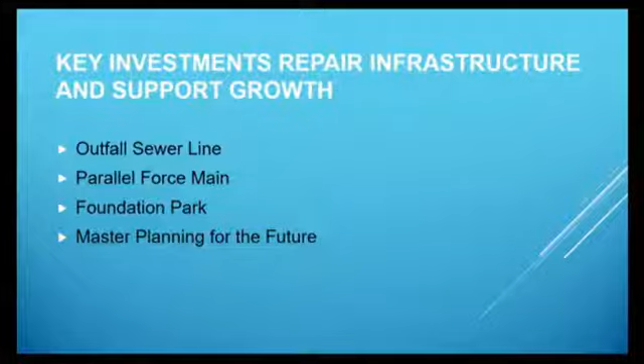First, the Outfall sewer. Why did we do it? There was a pipe installed nearly 40 years ago, a concrete 66-inch pipe with what we call a bituminous liner. That liner protects the concrete from the corrosive gases in sanitary sewer. The liner started to fail years ago, and ultimately those corrosive gases eat right into the concrete. Here's a picture: normally if you see rebar in a concrete pipe, that's at the midpoint. There were locations where the concrete was eaten past the rebar, and in some cases beyond it, so we could actually see the rebar cage sitting there. Clearly time to replace it.

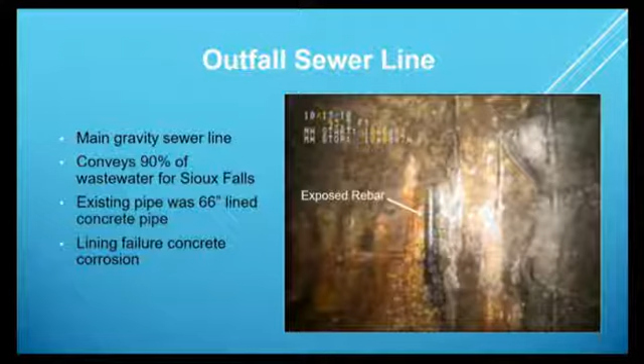The slice of pipe behind us is the best pipe made today. It has inherent corrosive resistance, and it's also larger for additional capacity. This pipe conveys over 90% of the city's wastewater, and is certainly going to be here for generations to come.

So, the overall picture of this project: it started at the EQ Basins, near the Street Division campus, essentially just north of John Morrell by the spillway. We did an improvement that allows us to fill those equalization basins faster. When we get a breach into the system during a major rain event, modern wastewater systems need these equalization basins—essentially large bathtubs—where we can cut the flow off so we don't affect downstream infrastructure. We recently brought forward a project that expands those basins. Our current piping system only fills the basin at about 20 million gallons a day, and we've doubled that capacity to fill it faster at 40 million gallons a day, providing a lot more safety for downstream infrastructure.

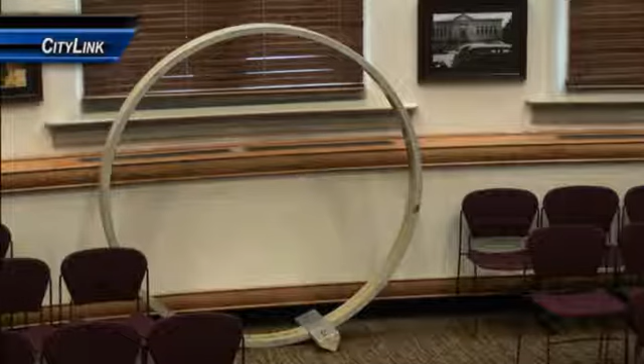You guys were out when we did the boring under Northcliffe Avenue. The same type of tunneling went under 229, and then we installed this 72-inch pipe that's behind us, which is in place for the majority of the alignment. One key change from the existing alignment is that the old pipe generally followed the direction of the Sioux River. Unfortunately, once that liner failed and the joints started to fail, we would take on additional inflow when the river would rise. So we took significant steps to move this new pipe as far away from the river as possible, so it's not under the direct influence of the rising tides of the Big Sioux River, and it also has much better access for the maintenance teams.

The designer on this project is a local firm, HDR Engineering, which works closely with our team. The project cost, with construction and design work, is $15.3 million. It's operational today and taking on flow.

Here's some pictures. In the summer of 2016, we took a field trip and you guys took a picture by those pipes and manholes before they were installed. The upper right shows some pipe going in—this is a local contractor, H&W Contracting, that does very good work. The lower left shows the point where they start the tunneling machine, and the lower right shows where the tunneling machine actually breaks through on the other side. Very close tolerance—you can put a pipe in at several hundred feet and be within a couple of inches, which is very important for gravity sewer pipe.

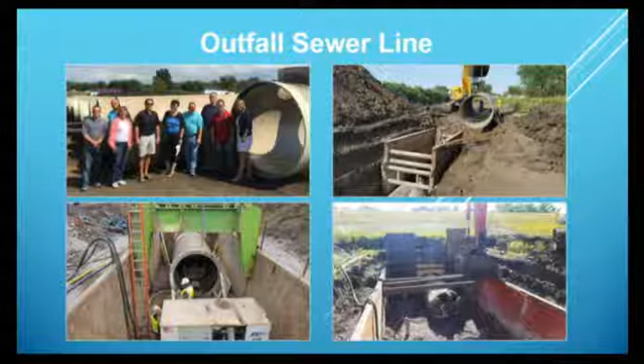Second project we wanted to highlight is the parallel force main. Just like the outfall pipe was made out of concrete, so was our existing force main. It's likely seen less deterioration because it's under force, except at the air release points, but it's still a risk for the city, and we needed additional capacity. So we designed a redundant force main—the existing one is 36 inches, the new one is 42 inches. It's a ductile iron pipe, and it increases our capacity up to 75 million gallons a day.

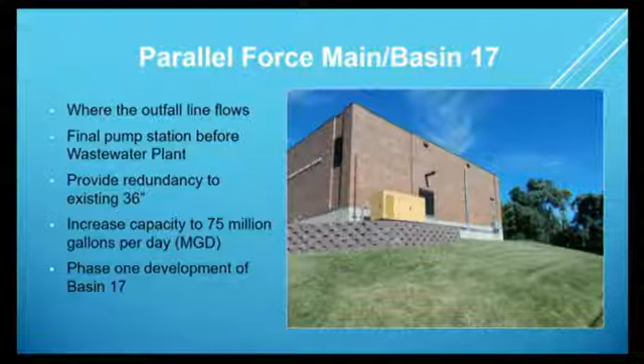We'll also highlight a project that a private developer funded, which has also opened up some land for redevelopment. They bid their project with ours, and it's a great win-win situation for us.

The designer on this project was also HDR Engineering. Project cost was $10.9 million, and the project has been operational. We'll continue to use our existing force main and this new one, rotating between them.

The Sweetman family owns about 450 acres in that area, generally between the Big Sioux River and Benson Road. They came to us and asked what our schedule was to open up Basin 17. We said at the time it's probably 3 or 4 years out, not anytime soon based on our current capital plan. I told them it's good timing if they wanted to consider funding the design and construction themselves.

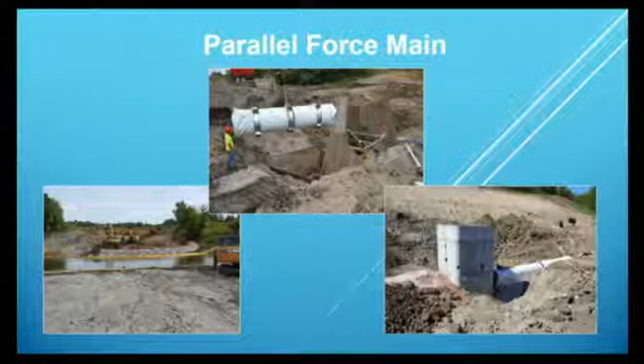The concrete structure in the lower right is an air release manhole. As you put a force main in, if you have any positive and negative grades at those bends, you need to be able to release that air so you can keep full capacity of your pipes, and that's what those structures do. As we do a grade change, we can get the air out so we can take full advantage of that area.

This project also allowed us to open up the land north of 60th Street for development, except for the area under the force main constraints. All the piping has been installed. We had such a mild fall that all the piping has been installed with the exception of the crossings at I-90 and I-29. The pump station is under construction and they'll be building that for several more months. So that project's gone extremely well.

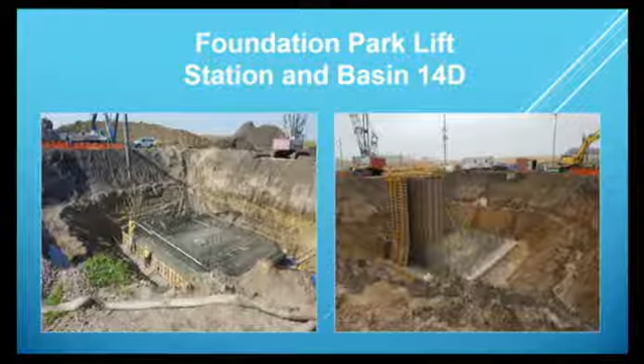With the amount of growth that the city of Sioux Falls and the region is having, for the last 2 years we've been writing the master plan that looks out 20, 50, and 100 years, so we can be proactive by identifying what needs to be done to rehabilitate the aging infrastructure. Most of this plant was built in the very early 80s, and it's a very corrosive environment. So we'll need to understand what needs to be rehabilitated, what needs to be expanded, so we can add capacity and capture the growth that's coming to this region.

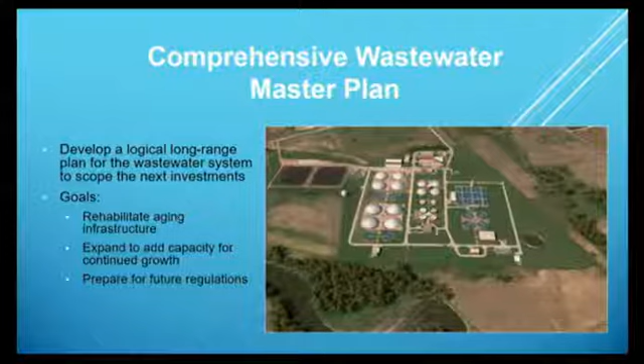And then lastly, prepare for future regulations. Our current permit, we expect, will get tighter, which will require additional constituents to come out of the wastewater. But it's been a very sound, reliable wastewater plant that has served this city for a number of years, and we want to make sure we continue to invest in it. We do have on your schedule, I believe in mid-March, to come before you and give you the look forward on what that master plan looks like.

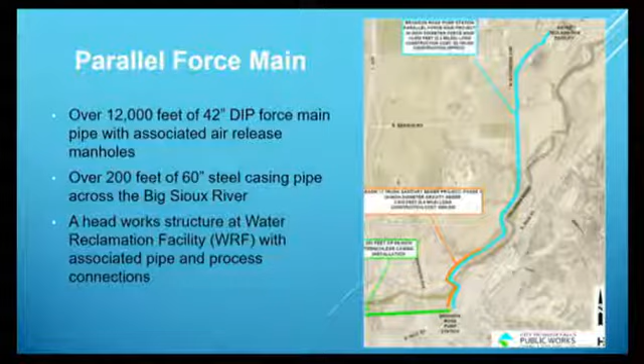Okay, great. And maybe my last one, the Foundation Park lift station slide - the green, yep, there you go. Was that the shorter term connection for them until they start using a lot of wastewater, and then you would go across to the wastewater plant? That's right. We've got capacity in this basin to the south that's not fully developed yet, so to minimize outflow on getting service to this area, this is what we'd consider phase one. If they continue to attract companies like Windchill that use very little water and wastewater, this solution will last for a number of years.

If a food production place comes in, that could change the game fairly quickly, but we've got a plan either way. We do have a sketch that phase two would, at the intersection where the horizontal line turns south, continue straight to the plant and take it there. Would that be an interceptor? Well, that would be a force main - a bigger force main. Right, that'll be under pressure, so we call it force main. Okay, very good, thanks.

Any other questions, Councilor?

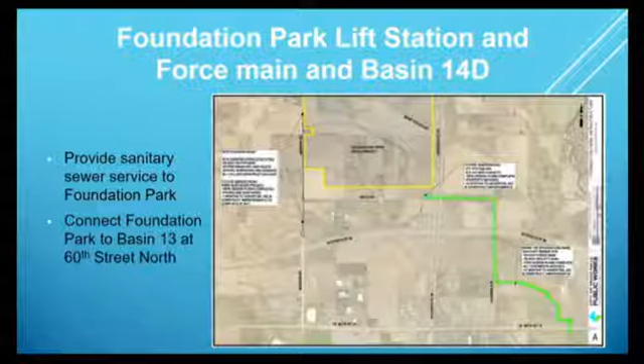Mark, going back to the pipe, the 15.3 million - if citizens would ask, that's coming from that low-interest loan, 100%? That's correct. And then that's going to be paid back from the enterprise fund? That's correct, and our current rate structures support all these projects we brought to you today. And how much is currently in that sewer enterprise fund?

As of the end of November, we had $22.4 million in the fund. About a month ago, we brought forward a project where we said we're going to switch it from loan to cash, so we'll be taking about $5 million out of that fund for the equalization project. But as of the end of November, that was $22.4 million. So it's 22.4 minus the 5 now? That's correct.

Okay. Would you happen to have the water enterprise fund with you by any chance? I do - the water available cash at the end of November was $12.6 million. Okay, then the parallel force main project, how much did that cost?

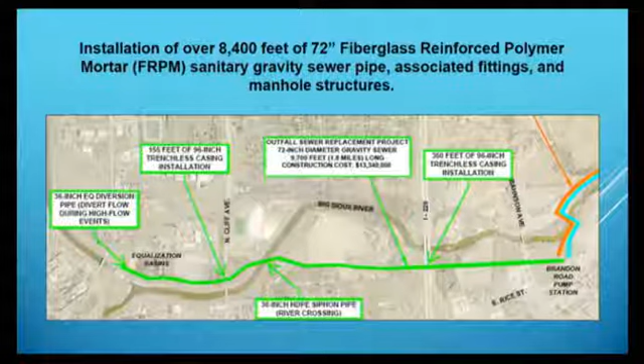It's common practice that you lay out a basin, and a basin would generally be, if you envision like a small valley, you put your interceptor sewer at the bottom of the valley, and the land, as whatever rain would drop on it and fall to that area, that's how sewer flows as well. You generally put those in, and once sewer starts to get beyond that 30-foot deep range, you should put a pump station in so you can kind of start all over again, if that makes sense.

So they're 30 feet below the surface? Some of our sewer pipes are, that's right. But the lift station, what's the dimension of a lift station? It all varies, I would say we've got some that are probably about a third of this room. We'd love to give you a tour if you wanted to see one. They all vary in size based on the type of design.

I think that'd be very interesting. Yeah, and I'd like to do so. We have things that are very visible, like water towers, and we have things like lift stations and gravity sewers that are out of sight, out of mind, but they deliver one of the most basic services that our customers expect every day. So, thank you.